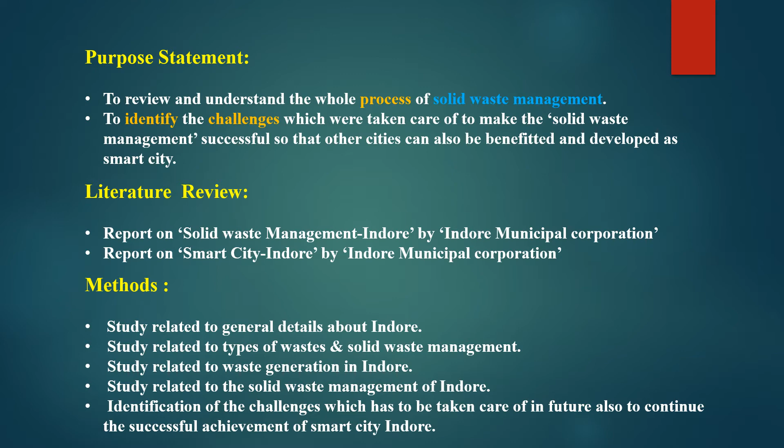To have a brief introduction, the Government of India has initiated various missions in order to move India into the development era. Among all these missions, the most important one is Smart City Mission, which is carried out in cities having potential to contribute to increasing economic growth of the country.

The vision of Smart City Mission is to have a planned mixed land use and to have a clean city. Now we need to understand why Indore.

Since Indore, situated in Madhya Pradesh, has the greatest economy in the central part of India, it had potential to be updated to a smart city. Hence it was considered under the smart city proposal, but the city was facing major problems due to poor urban spatial planning and insufficient infrastructure.

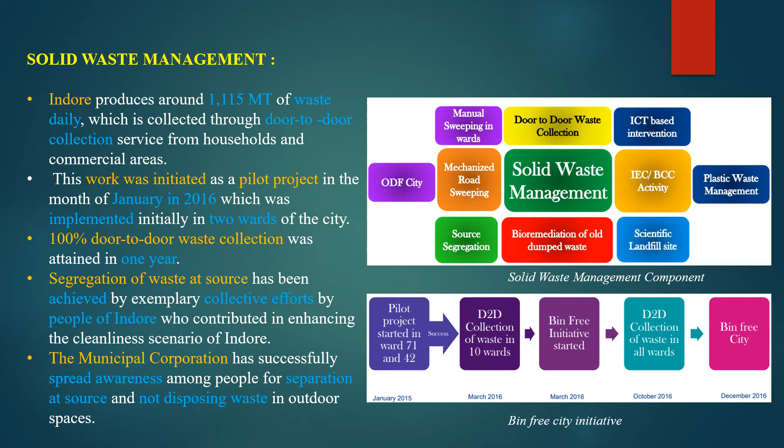Wastes are broadly divided into two categories, biodegradable and non-biodegradable waste, which can be further classified into wet waste, that is biodegradable waste like fruits, cooked and uncooked food, flour waste, vegetable peel, etc. Secondly, dry waste, that is non-decomposable, which can be non-recyclable or recyclable.

Thirdly, hazardous waste, such as lead and acid batteries, etc. Thus, wastes are segregated at source based on these categories. Then door-to-door collection is done from different zones and wards of the city.

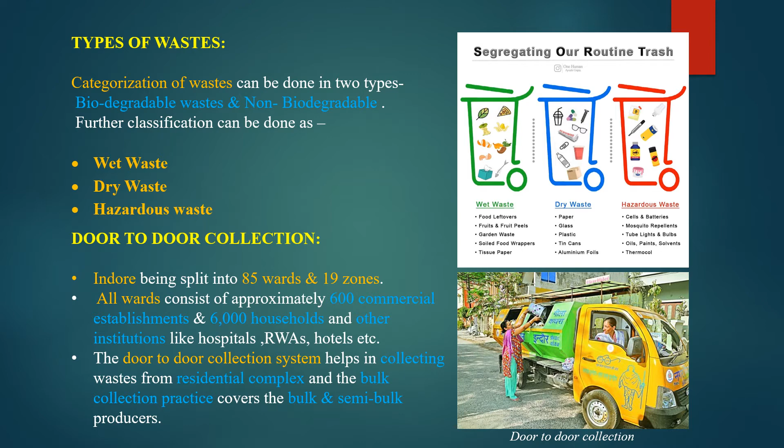The door-to-door collection process is done in sequential steps. The first step is waste generation and its segregation.

As discussed earlier, waste is segregated at source as dry, wet and hazardous waste by domestic producers, and as dry and wet waste by bulk and semi-bulk producers. Waste generators are categorized on the basis of quantity of waste produced daily as domestic generator, semi-bulk generator, and bulk generator.

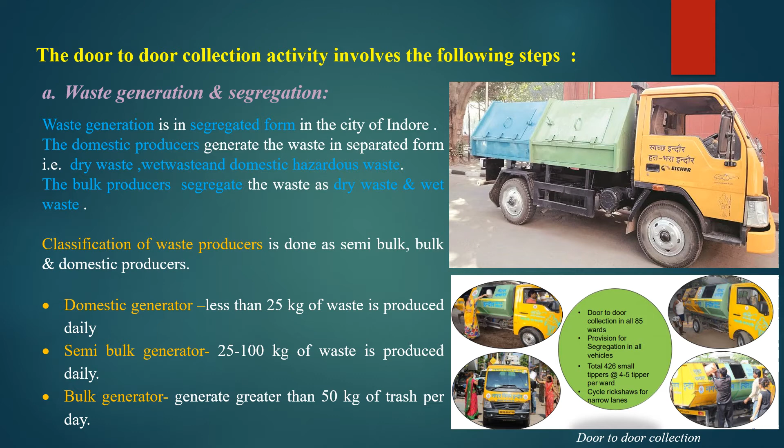The second step is waste collection and transportation. The waste from domestic generators is collected by tipper trucks in segregated form and taken to assigned garbage transfer stations, where it is compressed in compactors and further loaded on hook loaders and carried to the central processing plant.

Waste from semi-bulk generators is collected in segregated form as dry and wet waste by compactors and dumpers. The bulk generators have to process the wet waste on site and can dispose of only dry waste.

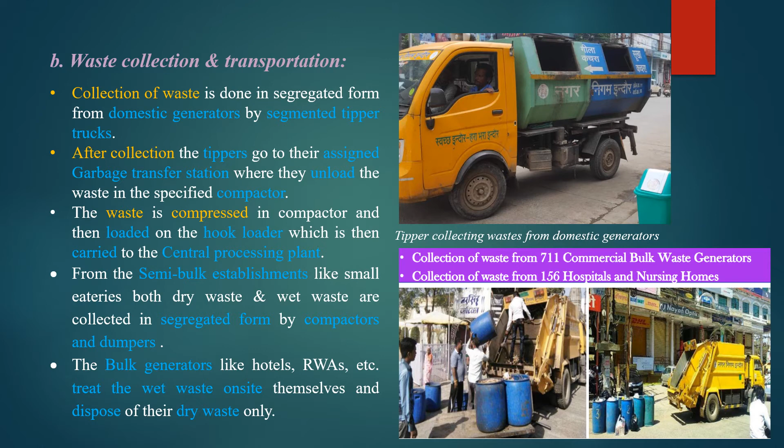The third step involves the garbage transfer stations, where the domestic wastes are collectively accumulated for further processing. Under the Solid Waste Management Plan, Indore has been divided into 19 zones and 85 wards.

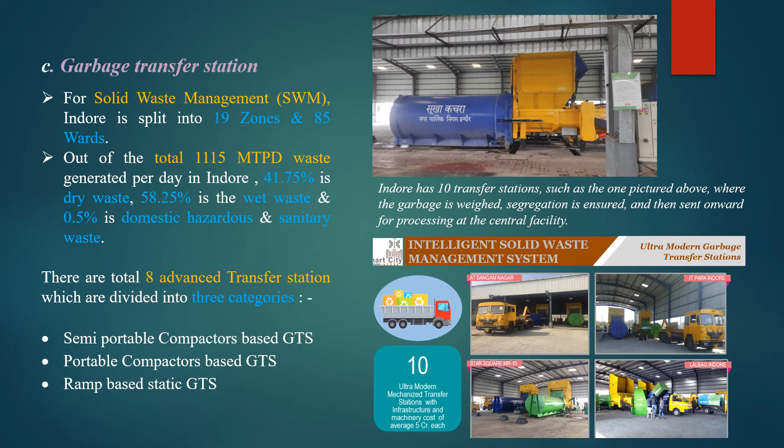To serve that, there are a total of 8 advanced transfer stations. These GTS are divided into 3 categories: semi-portable compactors-based GTS, portable compactors-based GTS, and ramp-based GTS. These GTS are installed in different zones of Indore like Lal Bagh, Star Square, Sangam Nagar, etc.

The waste from GTS is carried to the disposal site in a segregated manner. Wet waste is carried to the centralized composting unit for further treatment and processing, and dry waste is taken to the material recovery facility.

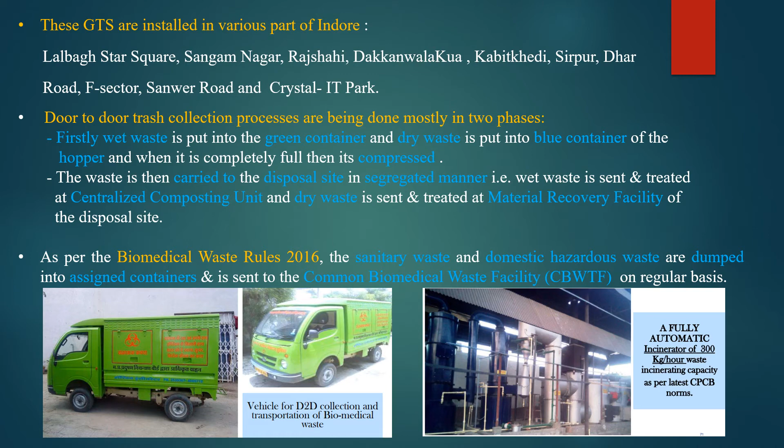The biomedical wastes are carried to the common biomedical waste facility daily for further treatment. A weighbridge facility is provided at the processing plants, with computerized weighing of waste before and after processing. As briefed earlier, waste processing and final disposal is done accordingly.

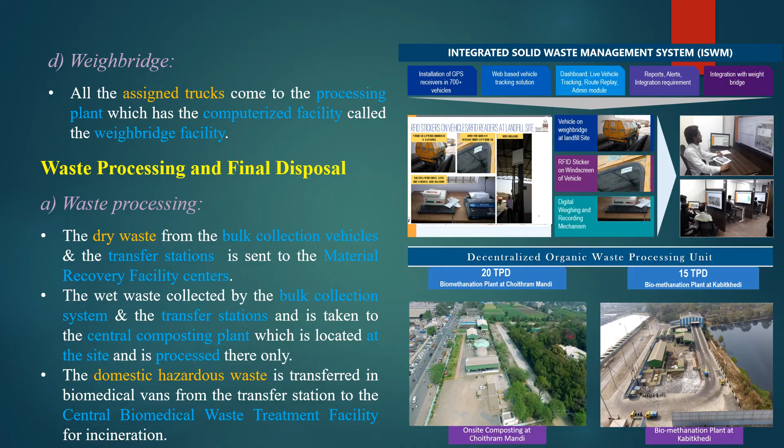There are composting units set up by the bulk generators within the compound itself to process the wet waste, such as by temples, hotels, and educational buildings, etc.

Biomethanation, that is the bio-CNG plant, has been built under the IMC policy for decentralized treatment of biodegradable wastes. This caters mainly to the wholesale fruit and vegetable markets, mainly the Choitram Mandi. A total of 800 kg of CNG is produced daily, which is used to run 15 city buses.

The discarded solid part at the plant is dried and reused as organic compost. The Plastic Waste Collection Center is also established, where plastic waste is recycled and reused in the construction of roads and in the cement plant.

The final disposal of waste which cannot be recycled or reused is done at the trenching ground called Devguradia.

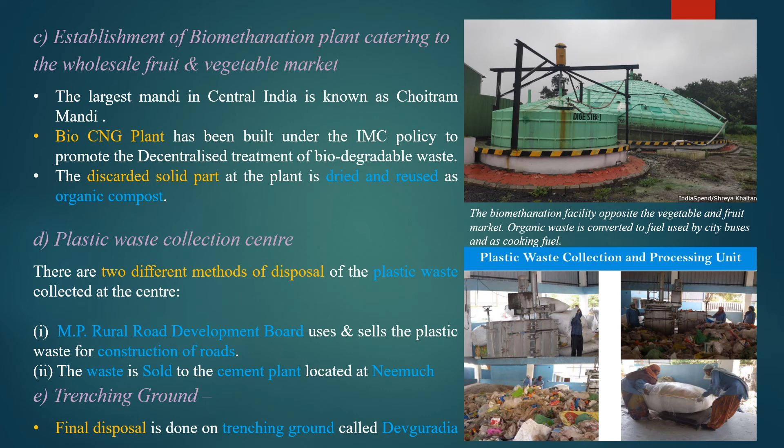There are a few additional initiatives taken which helped in enhancing the solid waste management of the city. The first one is measures taken to make the city open defecation free. This was done by educating people and constructing toilets.

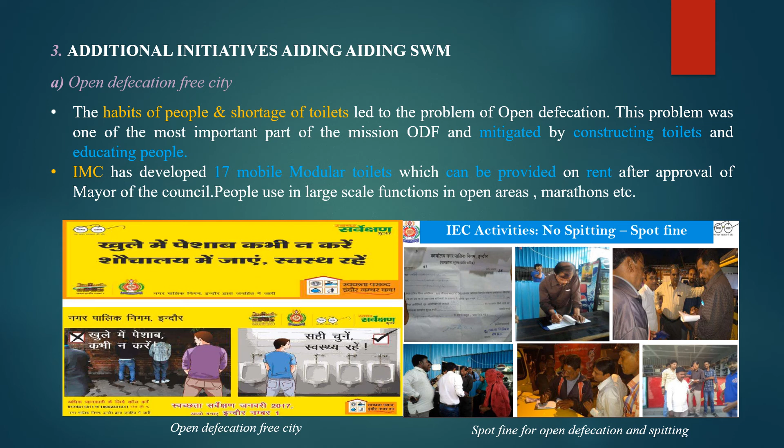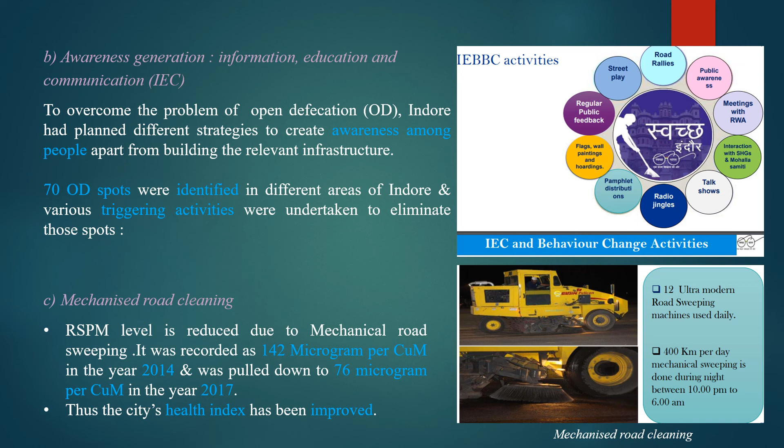Secondly, awareness was generated among the people of Indore. 70 OD spots were identified and triggering activities like spot fines and proper lighting of OD spots were undertaken. Thirdly, mechanized road cleaning was done, which reduced the RSPM level of the city, thus improving the health index.

Coming to the conclusion, the unplanned development and unchecked emergence of slums hinder the rational growth of the city, as it makes it quite difficult to provide services to the urban poor.

Indore has successfully achieved solid waste management, which needs to be continued and sustained by overcoming all the deficiencies of the present system. In order to achieve it, the following actions are needed.

100% door-to-door collection needs to be continued in a proper way. The city needs to be maintained bin-free. Adequate number of litter bins need to be provided in commercial areas.

Modern transfer stations need to be established at strategic locations. More energy plants need to be established. Awareness programs need to be held regularly so that citizens continue to follow hygienic behavior.